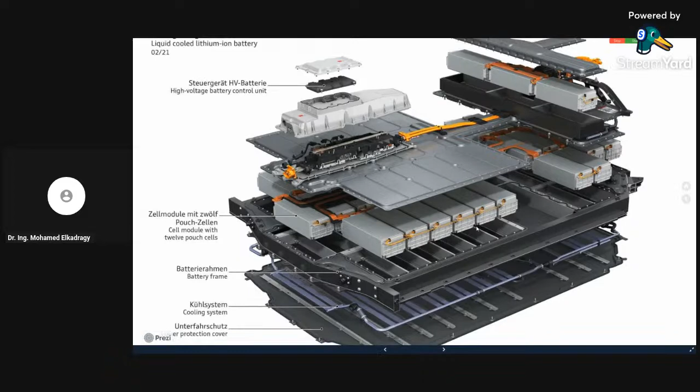Okay, we did start recording. So in the beginning, I was talking about... there is an echo. If you can mute yourself, there is an echo. Does everyone hear an echo, or only you? Can you try again to see if there is an echo? Does everyone hear an echo from me? Now there is no echo.

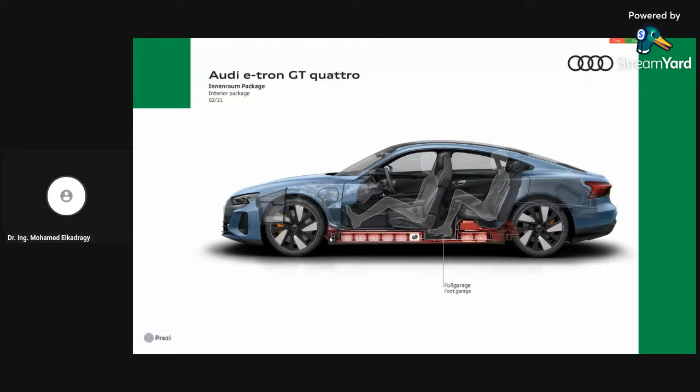So, for example, this is from Audi. Any EV has something on the bottom of the electrical vehicle, which is the battery. It's the backbone of the electrification of many EVs. Of course there are fuel cells, but batteries are the main focus nowadays for the last five years. This is one example of how a battery pack could look like.

So at the end, the battery has many components inside it. What I'm trying to always simplify for people, whether working in the battery field or not, is what are the main components, what are the critical parts you have to look at. The message is that batteries are complex creatures, especially lithium-ion based batteries. They are not as easy to handle as lead-acid batteries, and there are safety and aging complex problems related to lithium-ion batteries.

And even the next generation of batteries will have some problems, whether with aging or with safety. For example, solid state batteries are much safer, as we will see, but at the end they will have problems in the life cycle. So the battery topic is not as easy as it looks from outside. And if we look here, this is a whole battery pack.

For example, we have the cooling system of the battery, and not every battery has a cooling system. This is an automotive battery, so that's why it has a cooling system.

But I know that some people from the audience are coming from stationary storage. So normally in stationary storage, in a small battery in the home, you don't have a cooling system. You have passive cooling, so there is no cooling at all because you don't want to lose your energy.

In a container size, you have active cooling. So it depends on the application. You have cooling or not, and this cooling could be water-based or air-based.

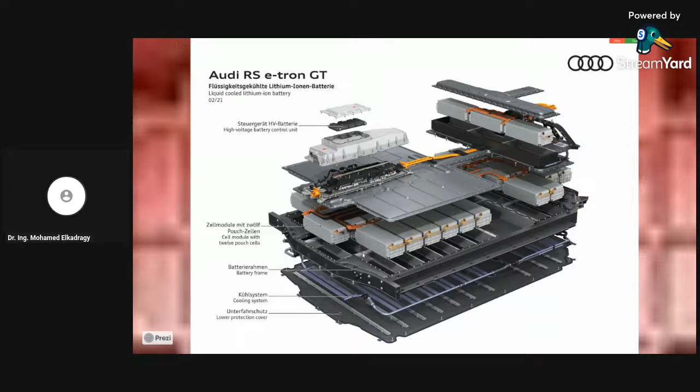And that's why the high voltage topic plays a big role, and the battery management system, the main brain of the battery, controls it. So this is very fast, the components, but of course, in depth, it looks much more complicated.

So before we started the webinar, there was a request to have a look on the battery chemistries, and especially the cycle lifetime and cost perspective. And this is a very, I would say, complex graph, but let's simplify it.

So we have here LFP, NCM, and NCA, which are three different cell chemistries from lithium-ion battery-based cell chemistries. LFP refers to lithium iron phosphate, NCM is nickel, cobalt, manganese, and NCA is nickel, cobalt, aluminium. And this is the cathode material.

Just for simplification, each battery has a positive and negative side, and in lithium ion, more or less, the anode is graphite, so it doesn't differ from one cell to another, but the cathode is what you see, the names here.

And LFP, NCM, and NCA, I guess everyone who nowadays interacts with batteries hears those names, at least hears about LFP cells. If you asked someone like 2-3 years ago about LFP or NMC or NCM, he would never know that this is a subcategory from lithium-ion battery. But now people are starting to get crazy about batteries on social media, distributing knowledge and so on, and that's why it's very well known now with these subchemistries.

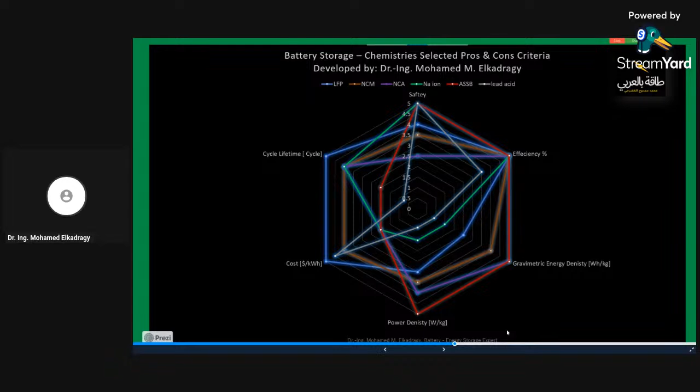Just a question about the source of information of this graph. This is it.

No, I'm kidding. The source of information is based on my own experience, plus all the literature I did find really evaluating cell chemistries. I did list the sources at the end of my presentation, but there is a lot of literature review which I did myself to gather this information, plus what I did see because I did battery testing myself, and I saw the effect of having this chemistry on this amount and so on. To be honest, this graph is very dynamic because we have changes every day, for example in the cost perspective.

So did you get what I mean with the source? It's not only one source. I guess if we listed the sources here, it would be maybe going to 20 sources or something like this. I looked everywhere - everybody has a spider diagram, we call these spider diagrams - and I created my own impression out of it to make it realistic, more or less. Did this answer your question?

It's a mix of academic and industry. Exactly, yes. And that's why I made my own graph based on what I see in many academic literature plus the industry experience.

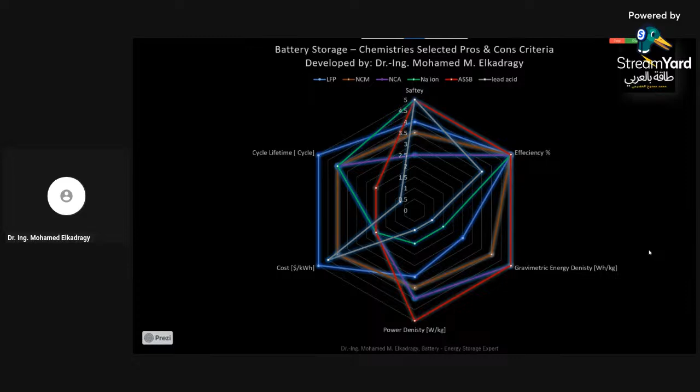Yeah, thanks. No problem. Any other questions? Okay, so...

As I mentioned, there is not only lithium-ion batteries, but there are a huge amount of batteries that we know along 20, 30 years of lifetime. So we have lead acid batteries here - this is the volumetric energy density, and this is the energy density per kilogram. As I mentioned, lead acid batteries are not very attractive for many applications.

Lithium ion, as you see, is sitting in the middle of the graph, more or less. There are lithium air batteries, solid state batteries with lithium metal, which is lithium based, as I mentioned. There are sulfur batteries as well, having a lot of development nowadays. Magnesium is getting closer to lithium. You can hear about sodium ion batteries from CATL, for example, and aluminum batteries. There are many different types of batteries which you hear about every day.

But from an industrial, practical perspective, not from a research perspective, what we have in the market is really the lithium ion push, the sodium ion namely from CATL specifically, and lithium sulfur is getting into the game - we are seeing in the market some cells based on lithium sulfur. Solid state battery has very high attention and industrial pressure. The other chemistries are interesting, but still in the early research stage, or in the second layer after those chemistries.

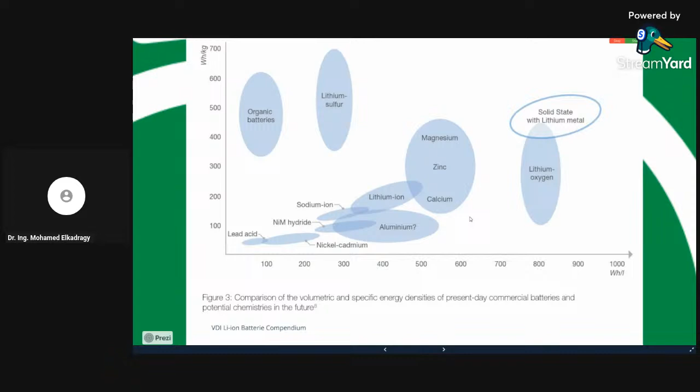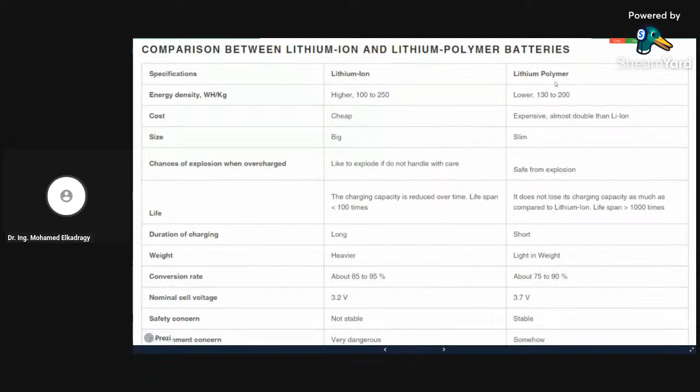There is lithium ion and lithium polymer batteries, but I will skip this and get to it maybe later, because we will discuss about lithium ion.

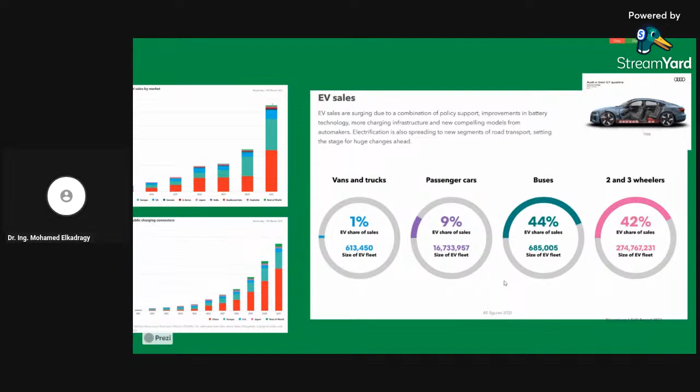This is the market expansion, or the market share per country, and of course most of the EVs come from China, and they are distributed in China as well, followed by the US, Germany, and so on. You can see how much consumption there is and how much production is in the Chinese market. That's why China is one of the main leaders in this industry as well.

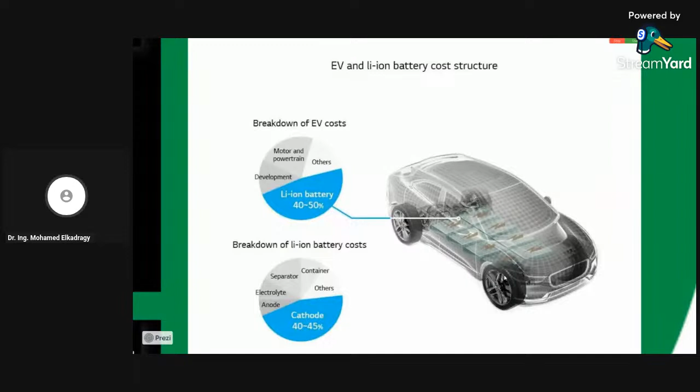I would hide this and ask you the question: how much do you think the share of a battery is inside an electrical vehicle structure? Just make a number in your mind. I will show it in a minute. If this number is less than 40%, then you are wrong. So the share of cost of a battery inside an EV is about 40 to 50%. That's why the battery itself can really play a major role in making EVs economically viable.

From electrical vehicles, there are battery-based electrical vehicles and there are plug-in hybrids, but plug-in hybrid vehicles are getting less and less in the market. So we are seeing a lot of battery-based electrical vehicles in the market as well, from many brands available.

This is a very, very nice overview of what is an electrical vehicle, or how we electrify vehicles, plus the brands working on it. This is not an exclusive list; there are many other brands working on this, and this is mainly for the passenger cars, the passenger EVs.

As I mentioned, there are battery-based and there are fuel cells, and each one has its advantages and disadvantages over the other. I have been talking a lot with fuel cell experts about this comparison. As you see here, there are many brands working on battery electrical vehicles, and few brands working on fuel cell electrical vehicles. This is really something we can see clearly in the EV market. The reason is that fuel cell EVs in a small size have many challenges inside them. I guess we can cover them in one of the next seminars, the comparison between both.

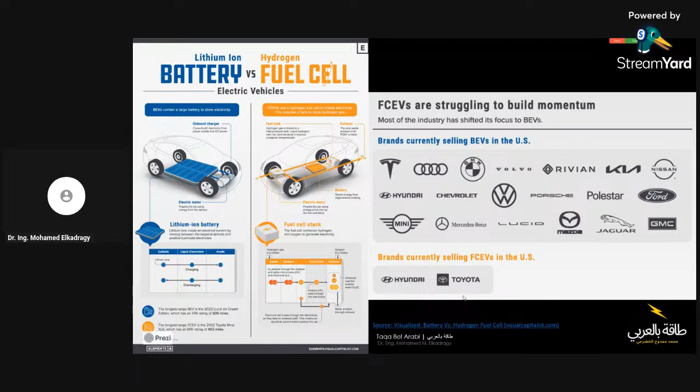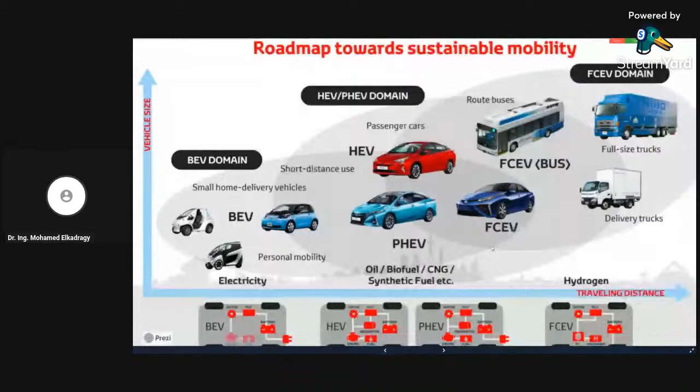But this is a very famous graph from Toyota, which makes it clear that depending on the travel distance and the vehicle size, fuel cell makes sense in big applications like buses, long distance trucks, and so on. But for passenger cars, they are more or less battery based. As I mentioned, let's discuss the hydrogen things maybe in the next seminar.

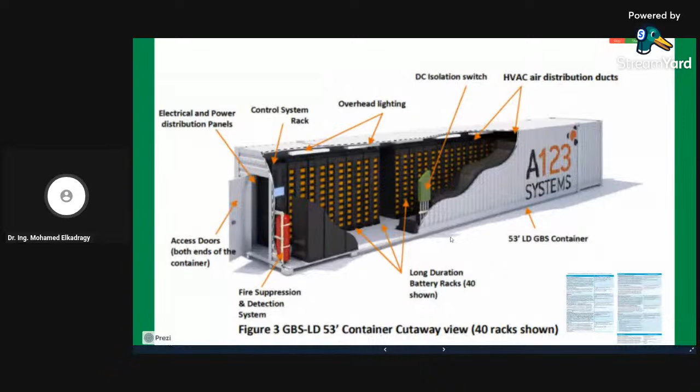And of course, one of the other applications which is common is having a container full of batteries. This is a common application, but this is one of the most important things which I always like to communicate: the battery value chain.

So without data, really high resolution and very detailed data, even from production, from the early stages of the value chain, you cannot really have a clear overview about the aging and safety status of your battery. This is one of the main messages I have to give here, even giving it quickly, and maybe we can discuss it in detail afterwards. But after you have the system in operation, whatever your system is, a battery container, a bus, a truck, a passenger car, or whatever, you have two options.

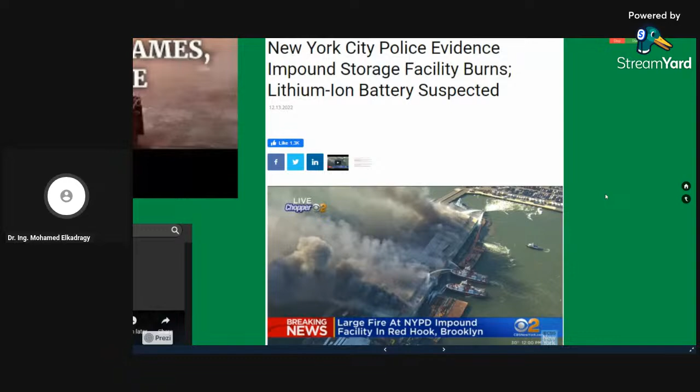The question is: thermal runaway can happen even when the batteries are not charging. This is totally correct, I did not say thermal runaway only happens while charging. It can happen even if you're not charging, that's right, but the possibility is different. I'll show you the answer in a minute. Maybe I can jump to the answer of this question because it's very interesting, because I made a survey myself just to answer this question.

And that's why the new regulations, especially in China, require 5 minutes of escape time. They put it in the regulation and others start to follow. But just to comment on the question, you are correct, it can happen while not charging. That's why in some countries like Australia, by definition in standards, you are not allowed to put a home storage battery in what they call a living area. You cannot put it in your bedroom, you cannot put it in your living room. You have to put it in a non-living area, for example your garage, so that if something happens to it, if you abuse it somehow, this place is outside, there is access for firefighters, and it will not harm your own life.

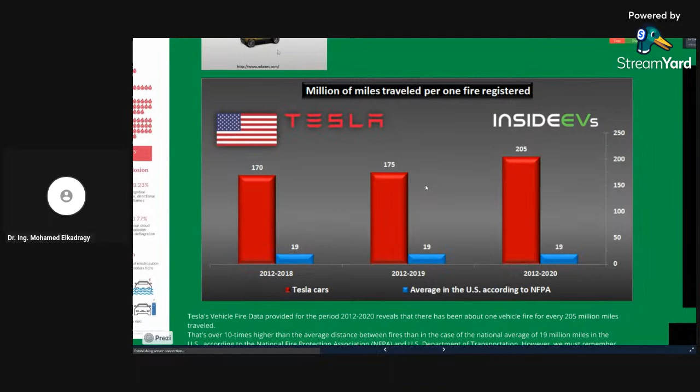This applies to Tesla, for example. Tesla sells more than half the market share of EVs, according to the last survey I've seen. That's why they are selling a lot, and that's why you hear about thermal runaway and safety events from them a lot. So don't mix up the issue of cars getting on fire with them not being safe. No, per mileage, they are safe. But as I mentioned, the problem is not the battery itself or the technology. The problem is mainly how you use your car, how you use your battery.

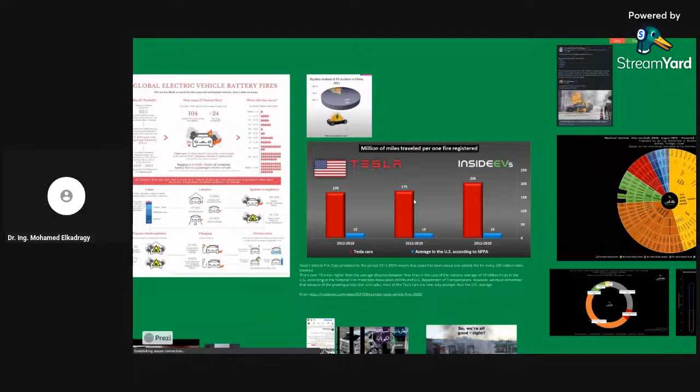I have seen videos of people driving their EVs in a crazy manner. Really, they are simply breaking the laws of physics, and then they say, okay, the battery is not safe at the end.

So this is something which I wanted to highlight about the safety incidents, and to put a battery fire into perspective, this is one of the best practices. This is a Tesla going on fire. As I mentioned, we hear about Tesla because they have a big sales amount, and really the fire aggressiveness is very, very high. I will skip parts of the video just to show this is what remains of the car itself.

You need a huge amount of water. Water is one of the things we use to extinguish lithium-ion battery fires, but we don't use it in small amounts. If you use a small amount, you are really making the problem much worse than it is. You have to use a huge amount of water, like this one, swimming in a lake of water. I don't know exactly how many tons of water were used there, but if I remember correctly, it was 40,000 plus liters. I calculated it once. So you can imagine this happening in a closed parking lot, I guess it will not be a funny thing at all.

Because the problem is in the thermal runaway event, the energy comes from inside the cell, and the oxygen comes from inside the cell itself in many chemistries. There are chemistries which produce less oxygen, like LFP, but there are chemistries which produce a lot of oxygen, and that's why you cannot easily extinguish a fire of a lithium-ion battery.

Because the only rule which I always recommend: if you see a battery fire, if you see white smoke, please run. People think that the bad thing is the black smoke. No, the black smoke is good. If you see white smoke, you have to run very fast. If you see black smoke, you can run at a less urgent pace. But if you see white smoke, you have to really leave the area very, very fast.

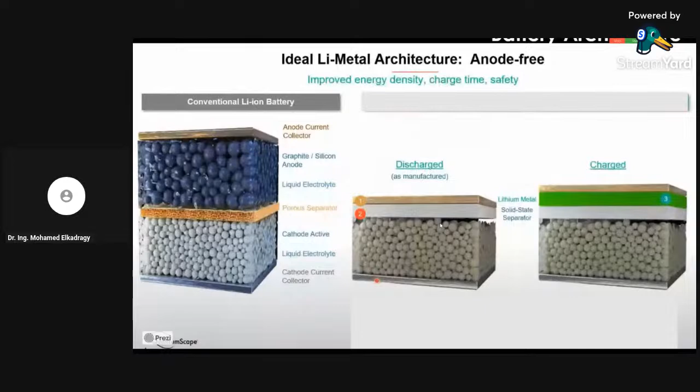But as I mentioned, there is a main difference between what you see here on the left and what you see here on the right. What you see on the left is a common structure of a conventional lithium-ion battery - this slide is from QuantumScape. What you see on the right is a lithium metal-based solid-state battery. The first thing you notice in comparison between both of them is the size per cell level - it's almost half the size, because we call it an anode-free battery. So there is a cathode, and it's solid-state electrolyte, not liquid electrolyte. The liquid electrolyte is one of the main unsafe things which give us a lot of problems during a thermal runaway event.

And in the first charge, you have the lithium metal anode, which then forms the solid-state battery. Solid-state batteries are a very promising technology. They are very energy dense, and you can have fast charging for them without having many of the problems you have with conventional lithium-ion batteries.

They have many issues inside them, but one of the main ones we cannot overcome. We always joke that each lab and company trying to develop a lithium solid metal battery got burned in the last 30 years because of internal short circuits. There are dendrites of lithium accumulation which penetrate the separator, causing an internal short circuit, and then the energy is not controlled, and you will have a thermal runaway or a fire event.

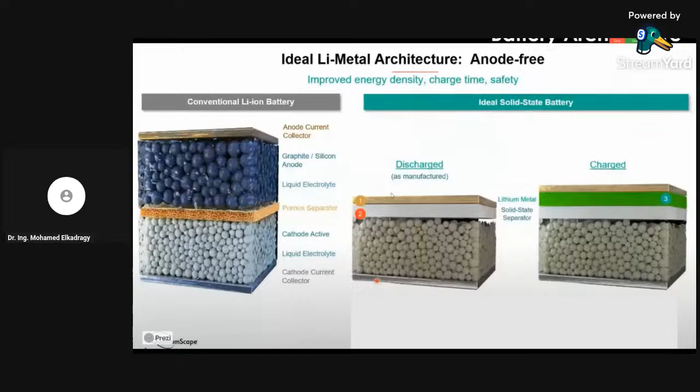I will skip this because of time. What I wanted to show here as well is the basic structure of a battery itself, how it works from inside, but I will skip all of this.

Maybe we can still do it, I don't know how much time we have. Dr. Nassar can tell us if I can. We are booked for 2 hours, so we still have time. Okay, perfect, I guess the audience isn't bored enough, so we can continue.

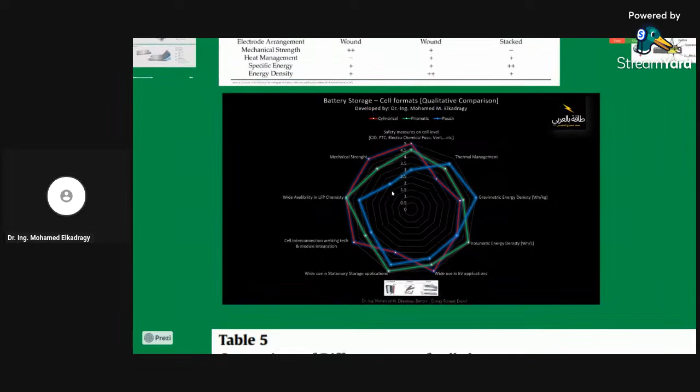This is one of the points we discussed in the beginning, the graph of cell chemistry and cell formats. I think there was a question about this, and we gave an example of the blade battery from BYD. But looking at cell chemistry alone as one part of the equation is not correct. You have to look at the cell chemistry and the cell format, and even at each step of the value chain.

Because at the end, the whole value chain plays a role in having a safe and reliable battery. If you have the best cell in the market but integrate it wrongly in a module or pack, then you've done nothing. And if you cannot design your application correctly or monitor it correctly, you've done nothing as well. So the whole value chain has to be done correctly to achieve a reliable and safe battery.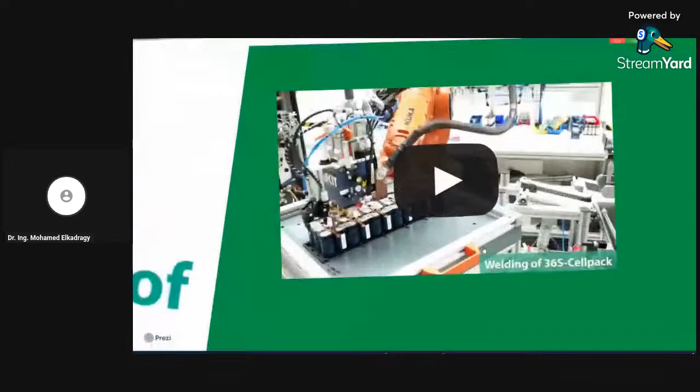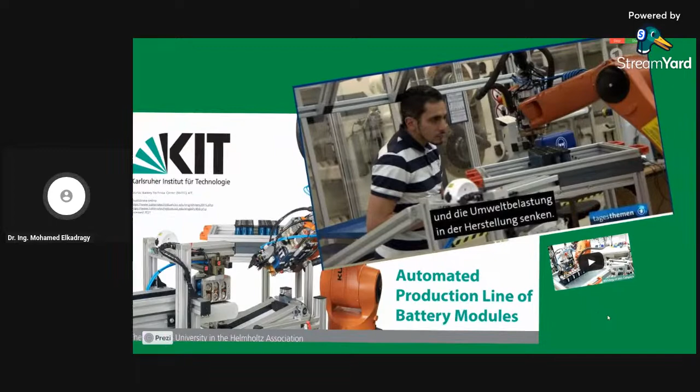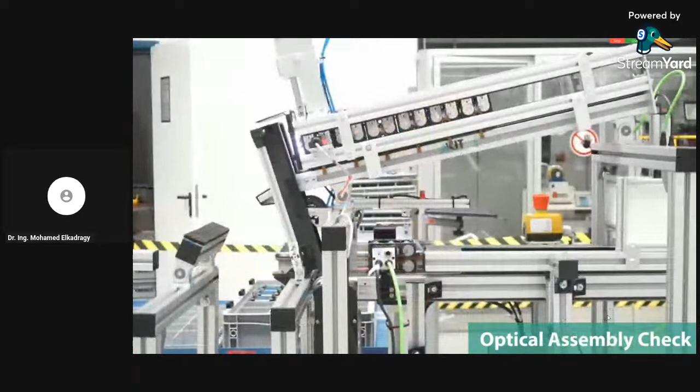Maybe the parts I skipped we can cover in a follow-up seminar. But going from one cell to a whole battery module, I'll give you an example of a production line I developed and participated in during my time at KIT. At the end you have different cells welded together using various welding techniques, and this is one example using resistance welding. Then from one cell you get a pack, a module, and at the end a whole battery system that can be used.

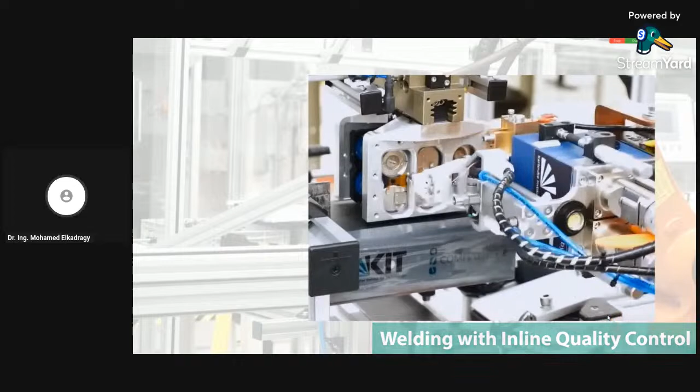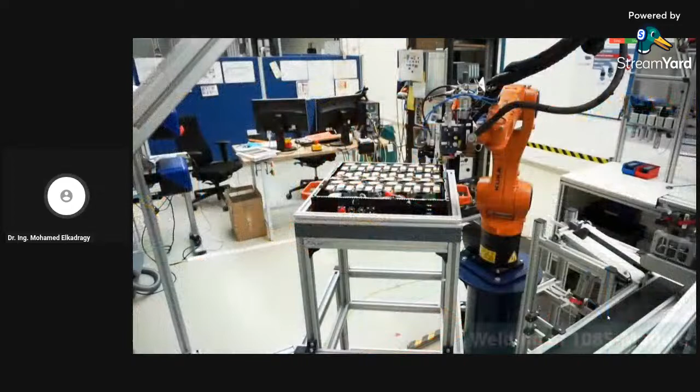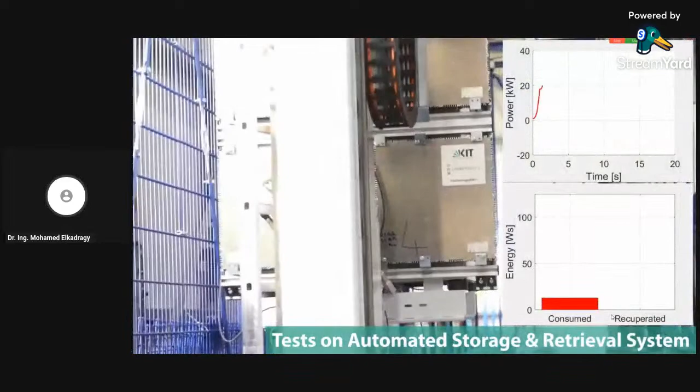I personally developed this robot, I consider him one of my kids, together with the team at KIT. You can imagine why we chose to use a robot for resistance welding - in the market, if you open a power bank, you'll often see someone welded it by hand or used very cheap welding techniques. This is an example of how you have to treat cells correctly along the process to end up with a reliable and safe battery, even in its first life.

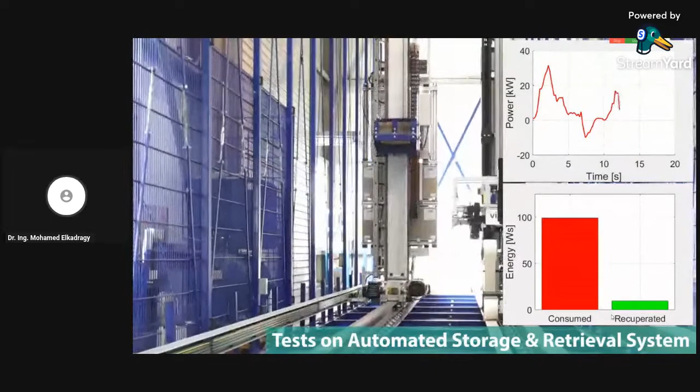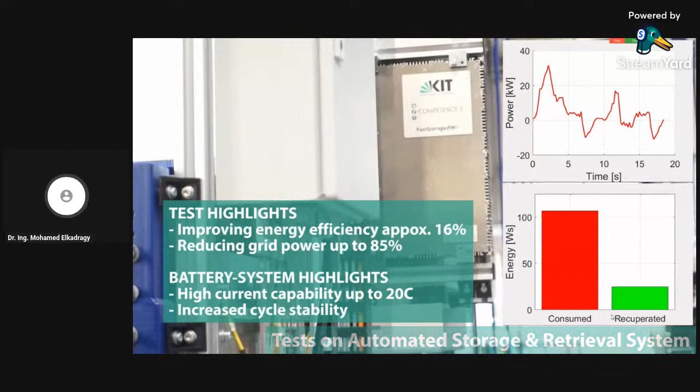If you don't do this, nowadays, because of the lack of standards, a lot of things go wrong in the market. But there are also a lot of people doing it correctly, you just have to pay for it. If you do this the correct way, you minimize your risk. The risk will not be zero, but you will minimize your risk of safety and aging problems at the end.

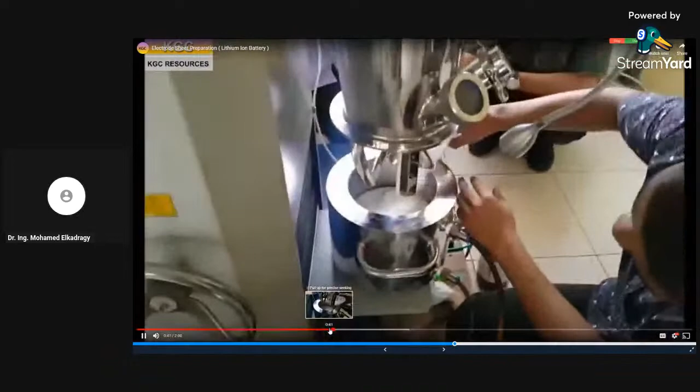And on the other side of the coin, there is this nice video from YouTube of people producing cells in this very nice manner here, saying, okay, we're producing cells. And you can imagine that those steps here have to be done, maybe some of them in a clean room, in a dry room with minus 40 degrees.

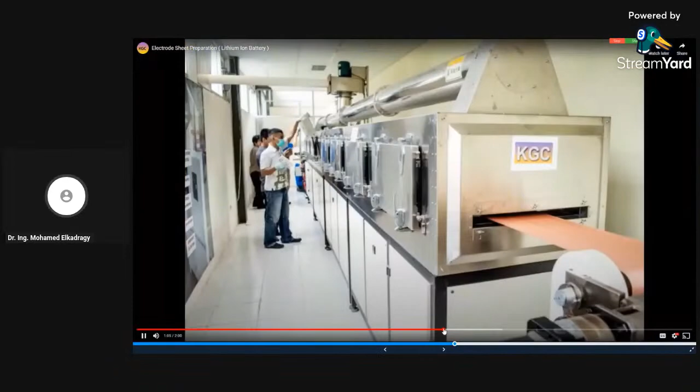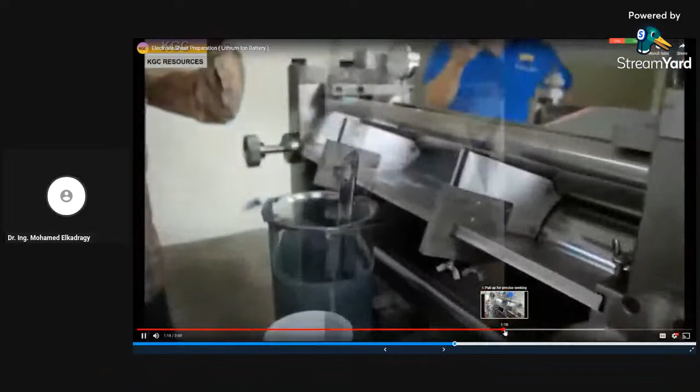There is a very interesting quality assurance issue with hand here. So this is the coating done by spoon. And yeah, I guess I don't have to comment further on this. I guess you can imagine what I mean by that. This is quality control by hand.

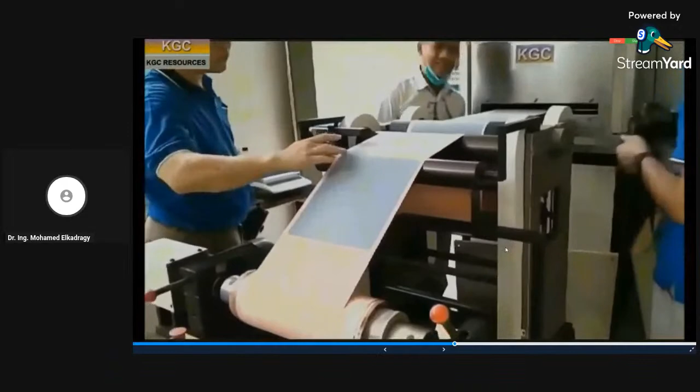Yeah, and I got the video from YouTube simply.

Getting back to the point of cell chemistry and cell format: a cell chemistry combined with the right cell format is just one part of the equation. And this was the message which I drove in the few minutes before. But people really sometimes neglect the cell format effect.

As you can see here, this is the same approach I used in the spider diagram, collecting the typical three cell formats which we have: cylindrical, prismatic, and pouch cells. For example, the BYD blade is a type of prismatic cell. So there are subcategories of pouch cells, how big they are, how the jelly roll is constructed inside. There are some details inside it. But in order to give something simplified that can be generalized...

You can see here that, for example, for mechanical stresses, cylindrical cells provide very good mechanical stability. That's why some automotive companies use cylindrical cells in their electric vehicles, prismatic cells as well, but maybe pouch cells are not very mechanically stable.

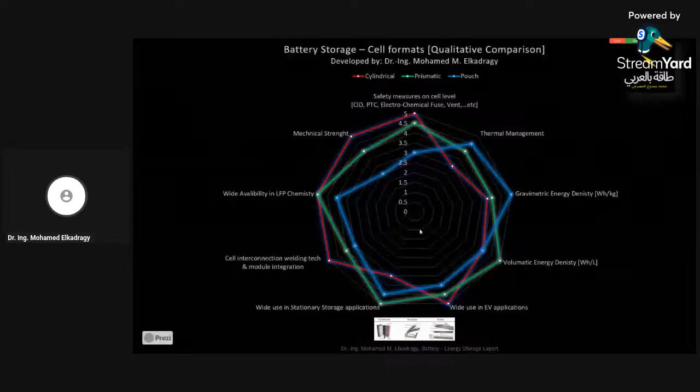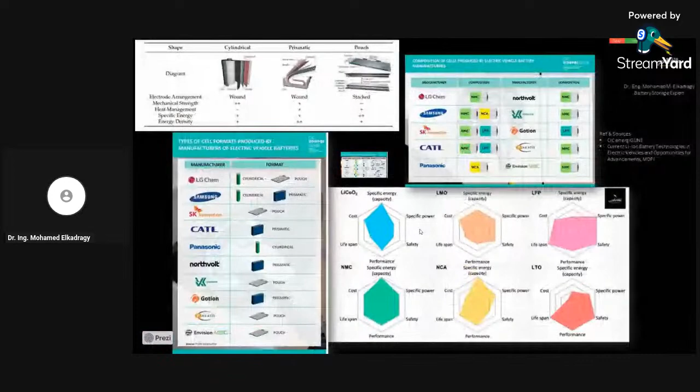And different companies produce different chemistries and different cell formats. So I will give here an example - let's jump to this. Those are the suppliers, some selected names from the suppliers, like Samsung, Northvolt, CATL, LG Chem, SK Innovation, SVolt, and so on. And you can see here which formats - let's look at which formats those suppliers are producing. For example...

CATL is common for prismatic cells. LG Chem produces pouch cells, very well known, and so on, and cell chemistries as well - for example, NMC. LG Chem is going as well to other chemistries. Samsung is producing prismatic and cylindrical cells, and NMC-based or LFP-based, and so on. NCA as well is produced by Samsung.

So the big OEMs try to really combine what they have as cell format and cell chemistry for their own application, and even have customized cells for their own electromobility or stationary storage applications. So it's not like an open market where you go and grab something off the shelf and say, okay, I have cells, I will put them together and put them into this application, and it will work. Maybe nowadays we treat it like this, but it's not the correct approach.

Sorry, unfortunately I have to go because I have to go to a meeting, but before I go, just one question. On your list, you don't have BYD, and I know they are one of the biggest suppliers. Is there a reason for that? In other words, do you have concerns over their product, or is it because I know they supply to the automotive industry as well?

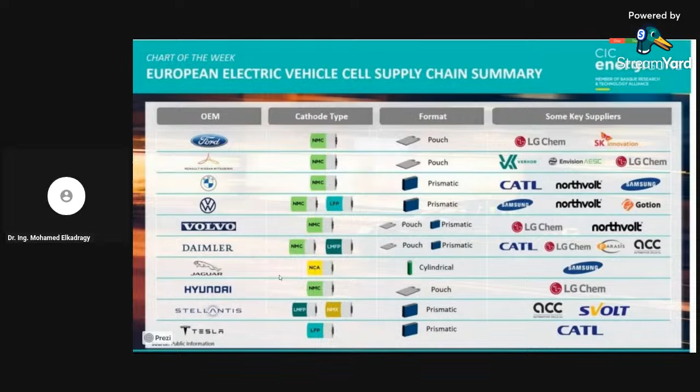That's why. But you are correct. So if we look at the upcoming slide.

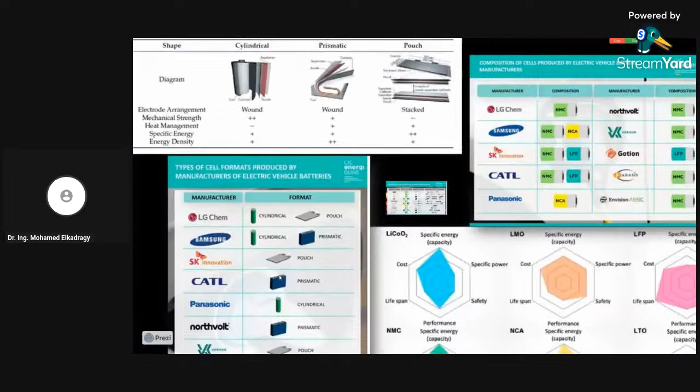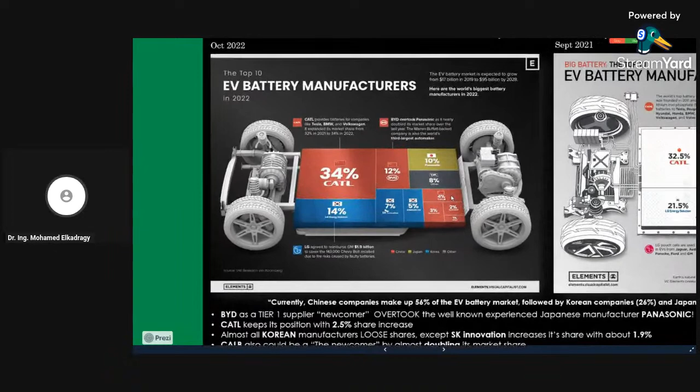So here you see the suppliers. This is last year, this is 2021, but let's focus on 2022. Who supplies most of the cells or batteries? CATL has 34% of the market share, followed by LG Chem at 14%, followed by BYD. And BYD overtook Panasonic, which is one of the well-known manufacturers, and I guess nowadays they overtook even LG Chem.

So maybe half of the batteries which we have in our world, which come only in EVs, come only from two companies sitting in China.

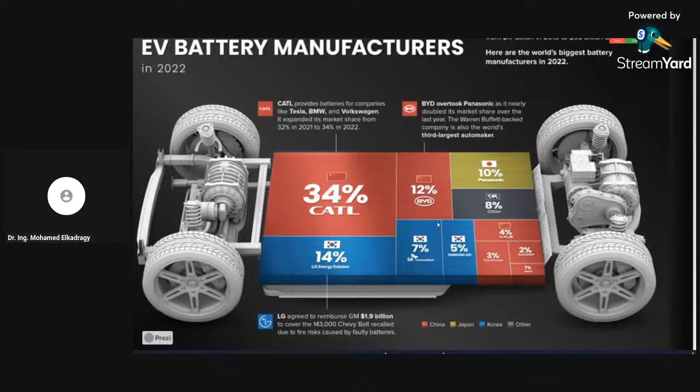Okay, well, thank you very much. Really, thank you for the generous share of information and the good presentation. Unfortunately, I have to go, but looking forward to future sessions. Yeah, for sure, we will have some follow-up sessions. I guess we will continue a bit here, and then you can see the recording. But I guess it's worth it to not overwhelm with information, and really make a follow-up session.

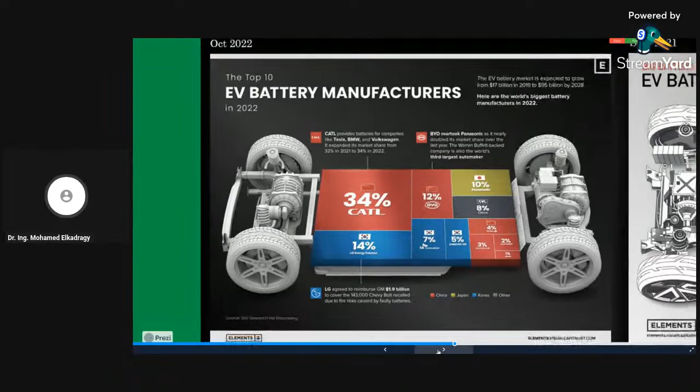So maybe I'll give one or two last pieces of information. Not all manufacturers are in the same tier. Not all of them have the same quality, more or less, in the benchmarking. So some are tier 1, some are tier 2, and so on.

And this is from 2022. These things change very fast as well. So you can see a lot of EVE, for example, maybe now they are tier 1 and so on. But there are efforts to put some standards into manufacturing, especially because of safety and aging issues.

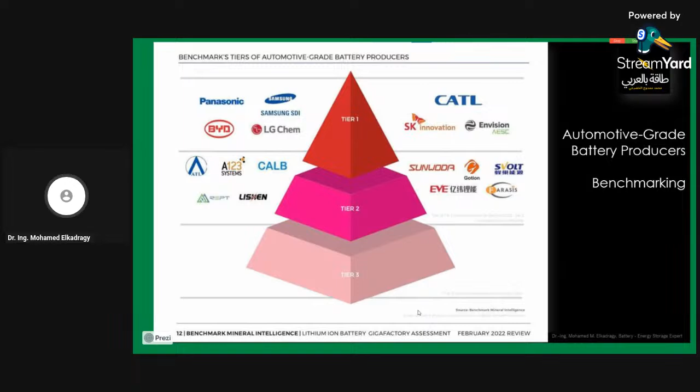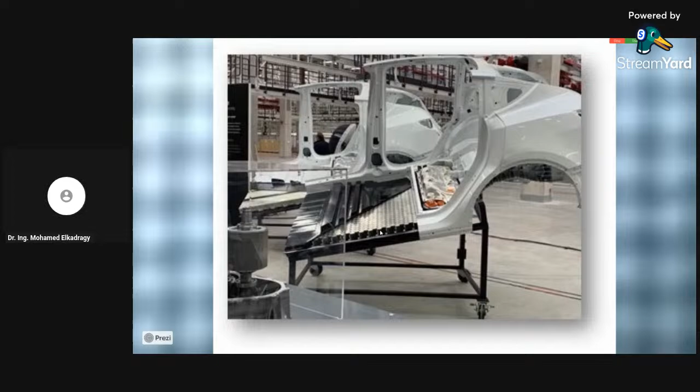There is a lot of room for innovation even on the integration and data analysis, as I mentioned, along the value chain.

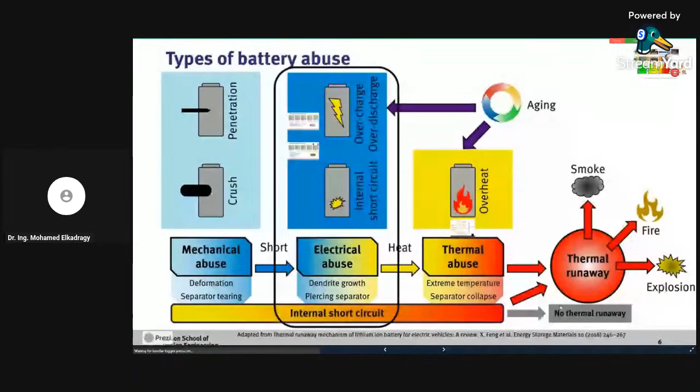Okay, I would like to propose that we stop here, because I will not be able to cover thermal runaway in detail, but I would love to cover one part of thermal runaway which is important. In case of a thermal runaway, it happens mainly because of many factors. I like this slide because it summarizes the main factors leading to a thermal runaway in a battery: mechanical abuse, like penetration or a crush; electrical abuse, which is one of the most common cases we face in the market; and thermal abuse. Maybe in the follow-up webinar we can discuss more about each type of abuse.

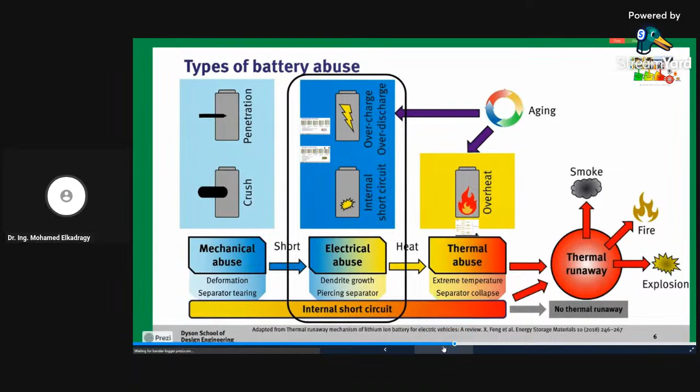But at the end, if you have a thermal runaway event, you get smoke, fire, and explosion, and those are three different, separate things. People think that fire is the main problem, but actually smoke is problematic, maybe even more problematic than fire itself.

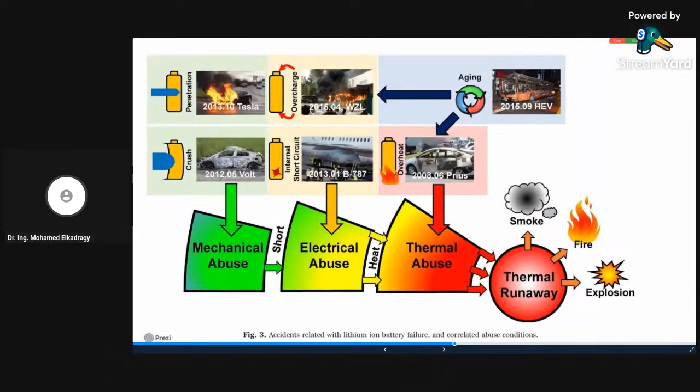So there's a lot of things people are doing wrong in a thermal runaway event from a safety perspective. This is a very important part of the awareness about thermal runaway I wanted to give here, because mechanical abuse, electrical abuse, and thermal abuse have all happened in many cases. I guess you've all heard about the Boeing case, where a battery caught fire.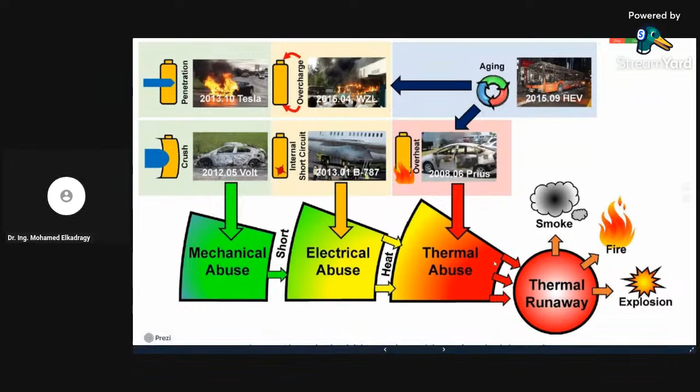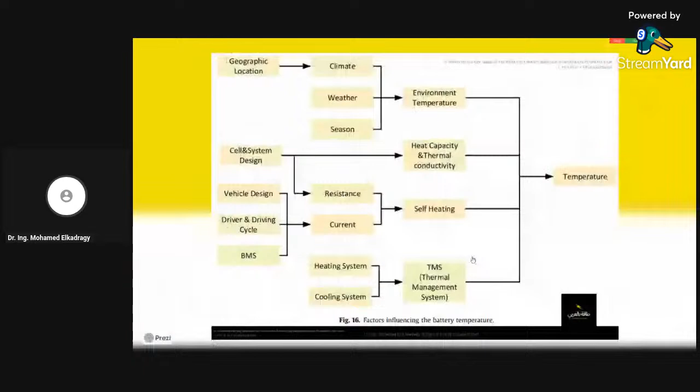Crashes which did go into thermal runaway, even cars catching fire without any kind of charging or discharging. Aging also plays a big role in safety. But we won't be able to cover all the aspects because of time and detail. The main message here is that dealing with thermal runaway is not done correctly in the market so far.

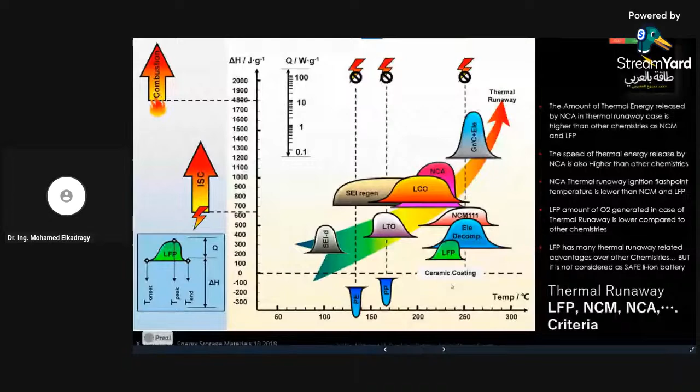And not every chemistry goes into thermal runaway the same way. I guess we mentioned that LFP may be a bit safer than other chemistries, but this graph shows that it may go into thermal runaway at higher temperatures, and it even produces less energy. But this is something we can discuss in a coming seminar.

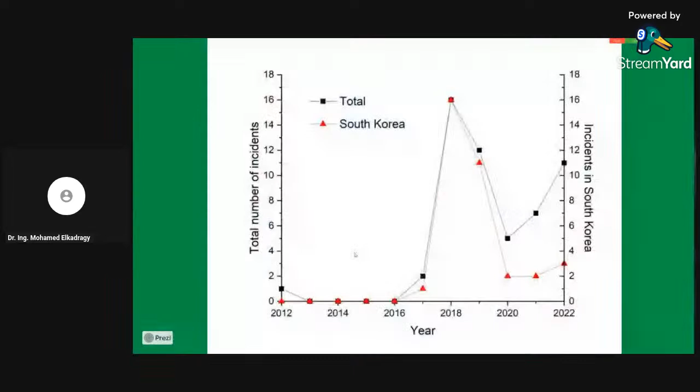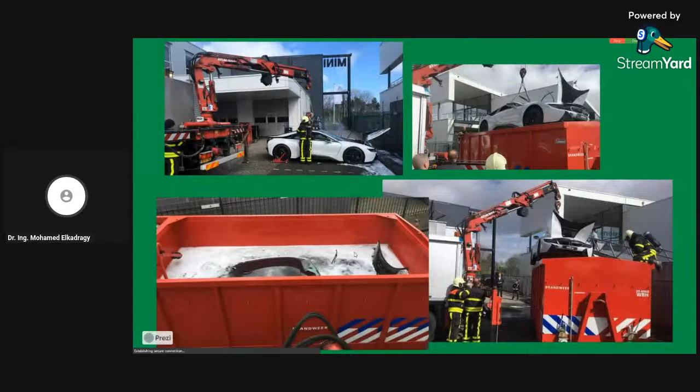So I will stop here. I will get back to this — this is how we deal with some thermal runaway cases, putting a car inside a container for some days, for example. And I will get back to the value chain here.

And open the floor for any questions. I guess we have given a very intense amount of information, and there's much more we could cover in the next seminar, but I'm very thankful for the opportunity.

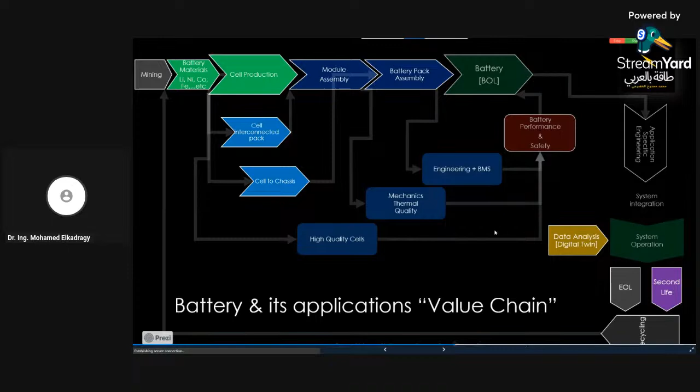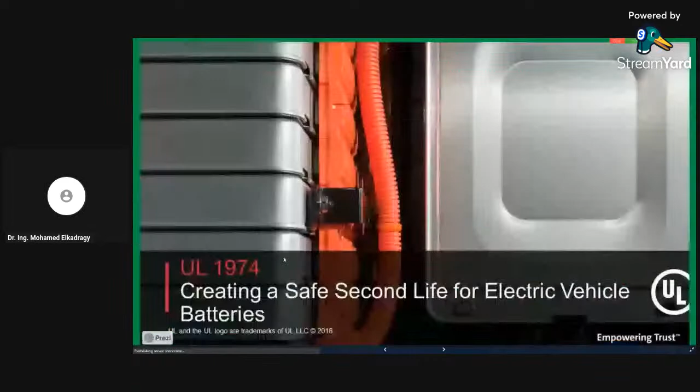The second thing, which I did not show but is very important to this question, is this standard — the UL 1974. It's a standard that came recently for creating a safe second life for electric vehicle batteries. It's an attempt from UL, a first step, to create a standard related to how we can standardize second life applications.

Okay, and the battery will be removed from the car when its life is like 80%? It can hold only 80% of its original capacity, yes. So this is the common practice.

I will show you a graph here from the aging part. The common practice is 80% relative capacity, but just to make sure we all understand relative capacity - this graph was from KIT, an analysis. So you have number of cycles, and your battery at the beginning of life can store 100% of its energy, 100% of its capacity, whatever the capacity is in ampere hours, and then it goes to 80%, which is more or less the end of first life. It's end of life, but some people take it as end of first life. Some people even try to push it further down to 70%, 75%.

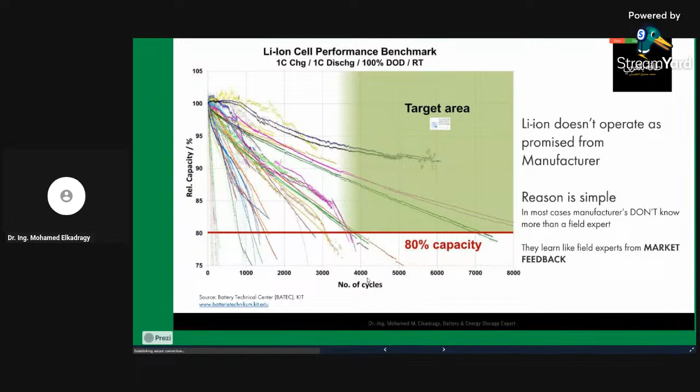Okay, and how fast do you go to this 80% limit? It depends on how harsh you are using your batteries. It's the depth of discharge, how frequently you are charging your battery, correct?

Yeah, but the depth of discharge is one thing. It plays a role for sure, along with the number of cycles you do. But all the aging mechanisms play a role as well. So aging itself is not a one-factor thing - it's really like a 4-5D matrix, a very complicated thing. It's a combination of what type of quality you produced with, and how you operate your battery, both of them.

I have a general question and want your thoughts. I hear a lot that it's better to keep your phone battery above 80%, and whenever it goes below 80% you charge it again so you can extend its lifetime. Is this correct? No, this is totally wrong - it's the totally opposite. That's why on my phone I have the limit of maximum charging set to 85%.

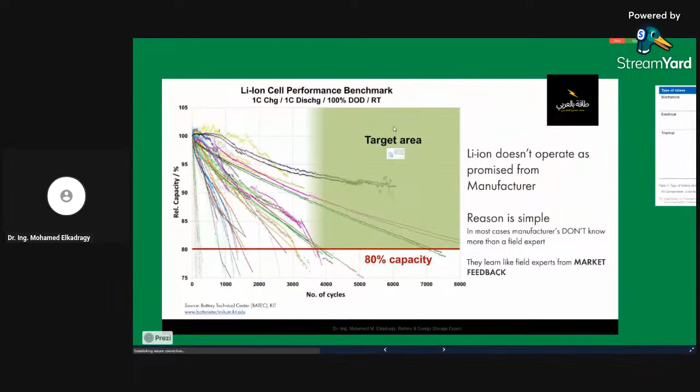For current lithium-based batteries, it's not good to go to 100% charging. This is what we call calendar aging. You've opened a very good question, a very good field. In aging in general we have mainly two effects - let me answer by going to the aging part here. Aging happens by capacity loss and resistance increase. The cell's resistance increases, so you cannot get a lot of current out of it, or you lose capacity over time.

For example, take a phone. Your phone started after two years of life, maybe one year for bad users, to not even complete one day on full charge, correct? Sometimes it happens, maybe even in 6 months. And this is because one of the things you said, which is totally wrong, is that you're keeping your phone at a very high state of charge a lot of the time.

No, it's the opposite. The best case, if we can generalize, is 20 to 80% - you keep your phone between 20 and 80%. That's why, for example, if you have an iPhone, if it goes below 20% it will tell you power saving mode is on. And if you reach 80%, the iPhone will tell you it's full, please remove me. And if you go to 90-100%, you'll see the phone takes the longest time to charge just that last 10%, rather than the whole spectrum.

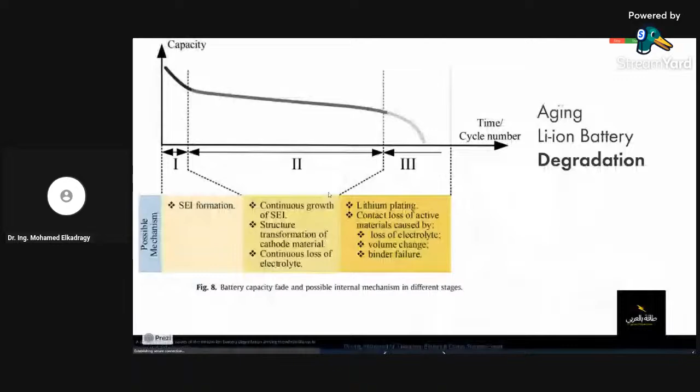Even on Android phones like mine, I can tell the battery to stop charging at 80-85%. I do this to my laptop, I do it to my phone, I do it to everything - I stop charging at 80%. Otherwise, after 6 months to a year, you are stressing the battery, because what really happens inside the battery, if I can go to the big graph here, is the aging mechanisms which happen inside the battery.

This is the cathode, the anode, the SEI layer, and the electrolyte. But this is something we can discuss in the follow-up seminar. If you are overcharging your battery, or charging it a lot, it's like forcing the lithium ions into the anode, making cracks and even building dendrites. This is a common misconception, not just yours, because it comes from previous technologies before lithium-ion batteries.

So the question is, if I'm only charging it to 80%, is this considered 80% energy? What is the difference between changing the battery when it reaches 80% of its energy storage capacity, compared to only keeping it at 80%? So the useful side is still 80%?

Yes, but this is 80% state of charge, and this is 80% relative capacity. Let's imagine this is the cell. 80% state of charge means I'm charging it to 80% of what it can accept. Let's say this battery can accept 100 ampere hours.